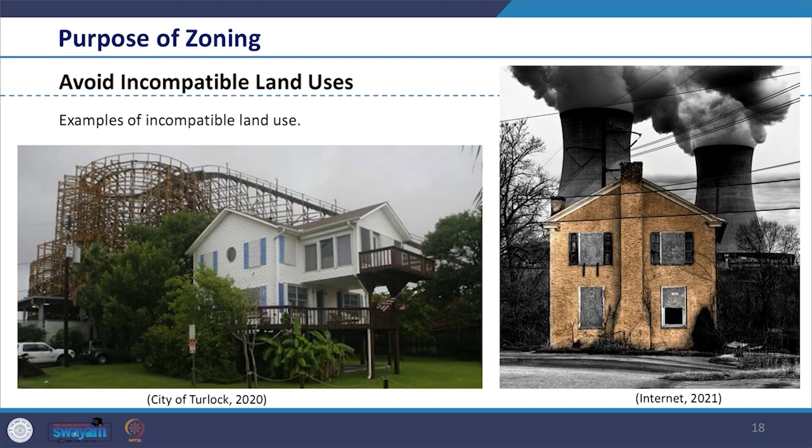Looking at the broader purpose of zoning: it is to avoid incompatible land uses coming together, prevent misuse of the land, determine the building heights and density, also look at how to give direction to the development of the city, and the need to secure convenience, health, safety, and look at the general welfare of the people.

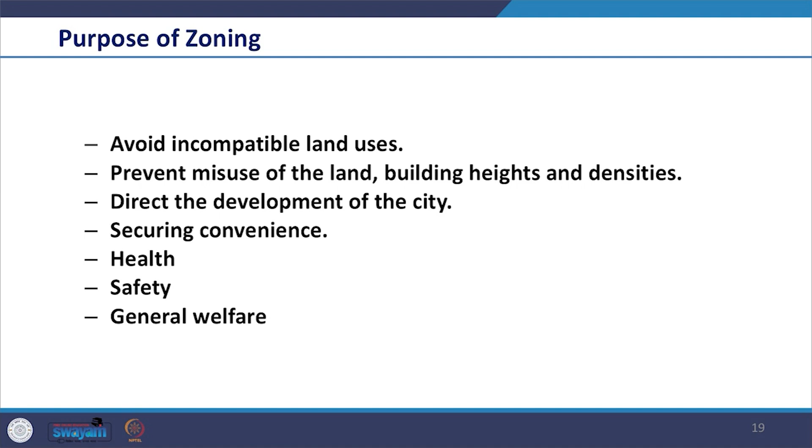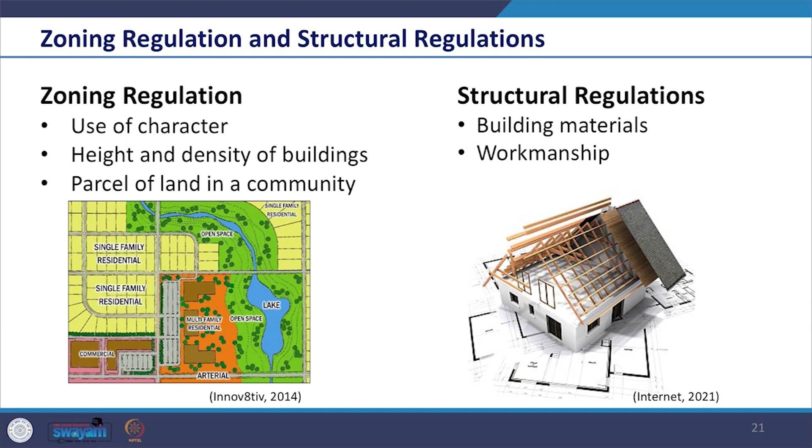Looking at the difference between zoning regulation and structural regulation: zoning regulations are meant for the use, character, height, and density of buildings, and they prescribe how each parcel, meaning the plot of land in a community or city, may be put to use. Whereas structural regulations impose restrictions on the building materials. It goes further into details of the building materials and workmanship in the form of specifications of the work.

Looking into the power of zoning and how it is executed, we see that zoning power is executed through the process of approval of plans for the proposed use and structure, and by means of site supervision. So that is how, by the approval system and the supervision system, we execute our zoning power.

Looking at the aspects of zoning, zoning is related to three main aspects. One is density zoning, height zoning, and the third one being use zoning.

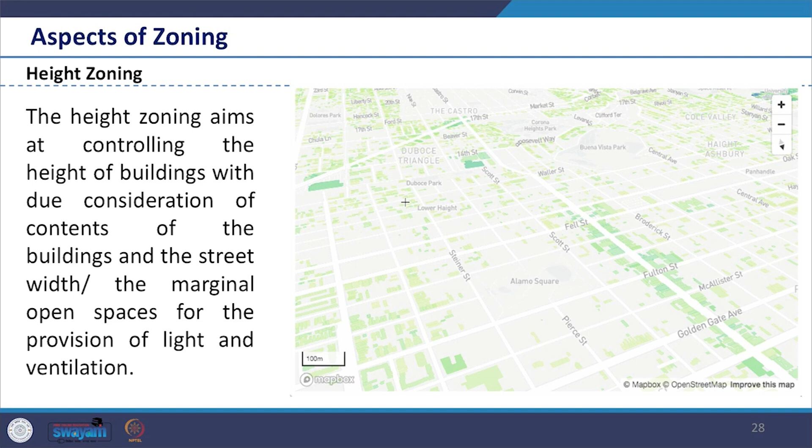In density zoning, the density of population in the residential area is controlled by means of suitable rules and regulations, whereas in height zoning, the aim is at controlling the height of the buildings with due consideration of the content of the buildings, the street width, and the marginal open spaces for provision of light and ventilation.

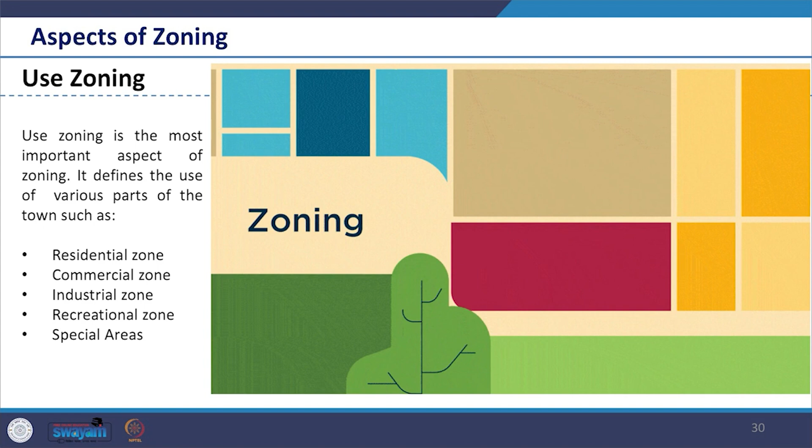Use zoning, which is one of the most important aspects of zoning, defines the use of various parts of the town, such as whether the use can be residential, commercial, industrial, recreational, or special area.

So we have seen different aspects of zoning. Now we look at different kinds of zones. Overall, there could be 43 use zones at the development plan level within 10 land use categories at the perspective level. Permissibility could be decided by the town planner depending upon the requirement and feasibility.

Now looking at the principles of zoning. The key principles which need to be considered are: one, to provide functional distribution of work centers and living areas, optimize the travel distance, and increase the efficient functioning of activities.

Further, to promote economic development, the whole intention of the urban area is for economic development, for all sectors of the economy by providing more economic space and efficiency; to preserve sensitive areas such as forests, parks, sensitive natural resources, heritage areas and water bodies; and to rehabilitate and improve the quality of life for residents.

We also look at securing health and safety by segregating hazardous industrial uses, as you may see in the example which follows. Further, to segregate nuisance areas or special uses such as logistics, warehouses, wholesale, airport, etc.

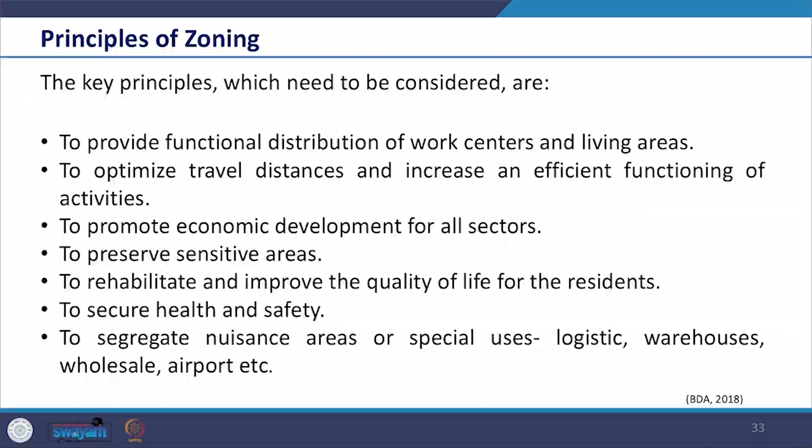Now we're going to look at and try to understand all these things through the case of the Draft Bhopal Development Plan 2031, particularly Volume 3. We will try to understand different zoning aspects and the kind of control exerted through the process and how it guides developments. We've taken this example because you've already seen the analysis and proposal vision of the city, so it will be easier to comprehend how we are translating that here.

Just to briefly refresh the problems we had seen in Bhopal through the draft Bhopal Development Plan. We're not covering all of them, just picking a few, like the challenge of conserving urban forests, water bodies and built heritage, as well as the presence of low density areas, FAR and ground coverage, and observations about a lot of commercial activities coming into residential areas.

Mixed land use activities were seen more in residential areas. Likewise, there was a lack of industrial activities, as well as observations about haphazard diversion of land and growth of illegal colonies.

So in order to address many of these kinds of problems, the zoning plan was created in the proposal. In the proposed land use plan of Bhopal city, we see that different use zones are identified. Use zoning is very important as it defines the use to which various parts of the town will be put.

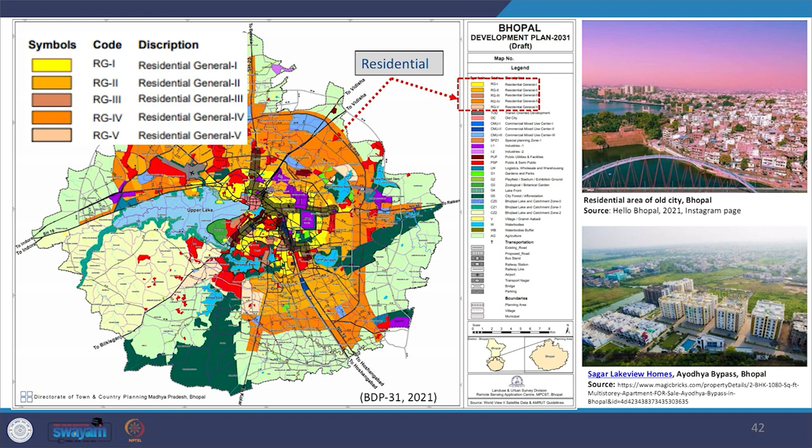Likewise, zone 4 is delineated for the purpose of urban expansion of the city, and zone 5 is delineated for low density to maintain and preserve the ecologically sensitive ecology of the city of Bhopal. So we see that through use zoning, different conditions and intentions are addressed even within the residential category.

We learned about TOD in our class as an encouraged trend in planning for efficiency, environmental and economic concern. We see here how TOD is translated into the land use zone. In the map, you can see transit-oriented development TOD shown in brown grid along the prime movement corridors.

Transit-oriented development zone is delineated as an overlay along phase 1 of the metro in this city. The purpose is to allow more people to live and work near the metro corridor. This zone is made up of existing older structures which shall be incentivized to redevelop with higher FAR, preferably undertaken through the local area plans.

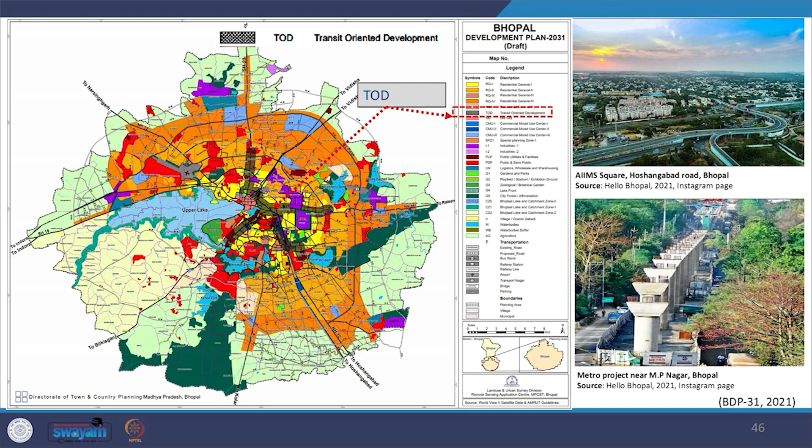You may also integrate and think about the local area plan we studied. Local area plans will be prepared to ensure the plot is utilized properly and efficiently through merger or amalgamation, and it addresses widening of roads, allows parking management, and also allows pedestrianization in this zone.

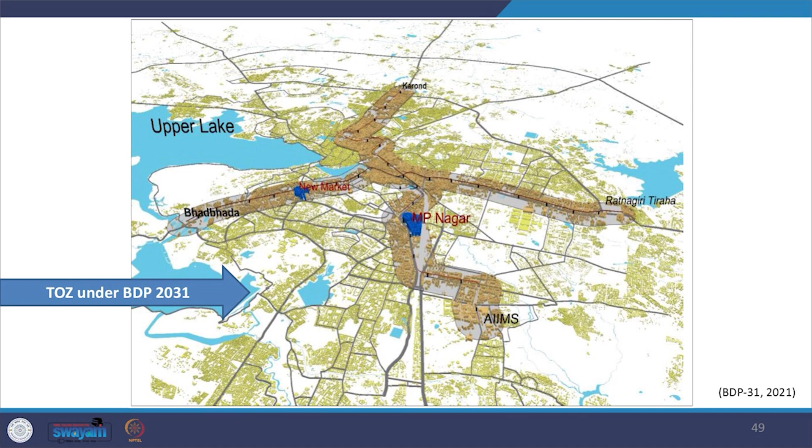The zone has been delineated 500 meters on either side of the metro alignment. Principally, all plots falling completely or partially within this 500-meter buffer from the metro alignment shall be included in TOD. The purpose of this zone is to allow and enable more people to live and work near the metro corridor. So you can see how it has been done here.

In order to promote compact TOD in the city and integrate land use and transportation interface, this concept is introduced. Transit-oriented zone is an effective tool to promote compact, transit-oriented development within walking distance of public transit nodes such as BRTS and MRTS stations.

Sustainable transit-oriented densification is planned to be achieved through TDR. That's the plan proposed by the draft Bhopal Development Plan. Transit-oriented zone is identified as a 500-meter buffer distance on either side of metro line 1 and 2, as you had seen in the map.

It is anticipated that TOZ, transit-oriented zone, will encourage people to prefer public transit, providing housing, employment, entertainment, and civic functions within walking distance of the transit nodes. It is anticipated that it will encourage residents and workers to drive their cars less and ride public transit more often.

So we see that Bhopal Development Plan specifies permissible FAR. FAR is a means to control density. There's also an aspect of density zoning.

Here you can see in the TOZ, higher FAR is being offered than the residential area. Here it's 3 FAR permissible, whereas for residential it was 2. You may also reconnect your thoughts to the type and levels of plans.

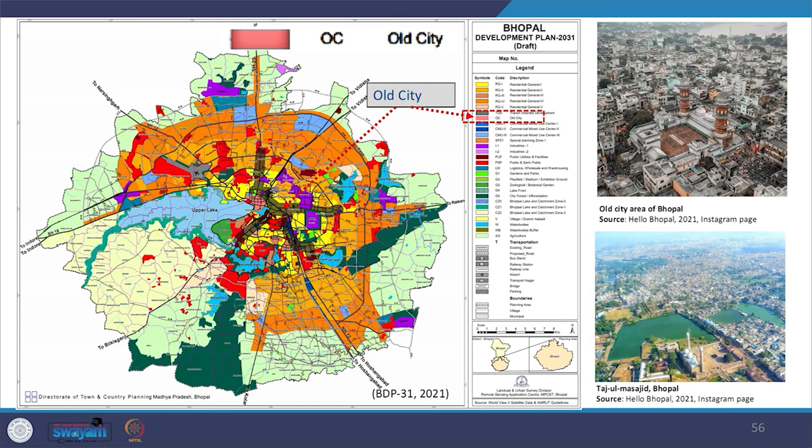For the purpose of conservation of heritage precincts and structures within this zone, the appropriate authority has recommended undertaking preparation of a heritage conservation and management plan for Old City Zone, where they would identify and categorize all structures and precincts based on their heritage value.

This heritage conservation and management plan would also be prepared by the urban local body or any appropriate authority, along with local communities and relevant heritage committees, to identify heritage structures and heritage precincts as listed by the State Archaeological Department in the Old City Zone.

Based on this management plan prepared by the authority, the plot owners within the zone will be incentivized to undertake preservation and conservation of their heritage properties through receipt of heritage TDR, transferable development rights.

Once the heritage conservation and management plan for the zone is prepared and approved by the appropriate authority, the regulations identified in that plan shall prevail over these regulations. So once that heritage plan is there, newer regulations would come.

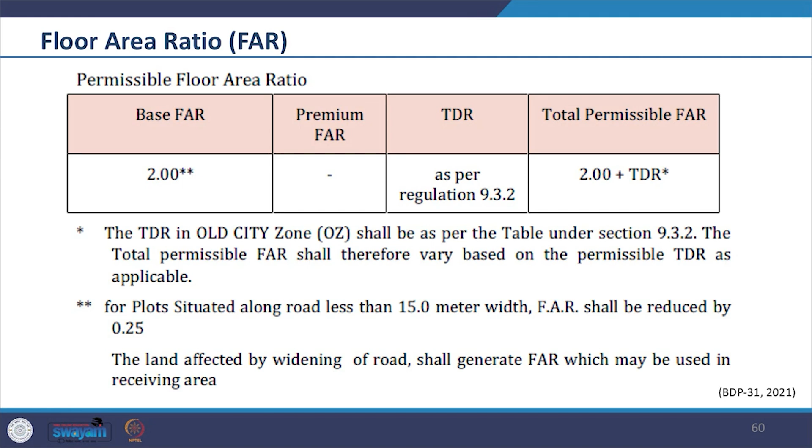You can see the FAR and TDR for the zone in the table given here, which is the total permissible FAR plus the TDRs for encouraging the management of heritage structures and precincts. So you see how cultural or heritage aspect is addressed in a city through zoning.

Moving on, we see next the commercial mixed use zone.

You can see how it has been distributed across the city to cater to the entire population. In the plan, the authority has divided three commercial mixed use zones as zone 1, 2 and 3. The first zone has been delineated envisaging the upgradation of the current commercial center of MP Nagar to a commercially mixed use center.

The target is to provide higher FAR so it can accommodate a larger population. The idea is to transform this place from commercial to mixed use, and higher FAR means increasing the density of the zone.

Likewise, commercial mixed use center 2 has been identified envisaging the upgradation of existing commercial subcity centers like New Market and so on, which will be converted to commercial mixed zone with higher FAR. Similarly, commercial mixed use center 3 has been identified as a new proposed commercial area under the Bhopal Development Plan 2031.

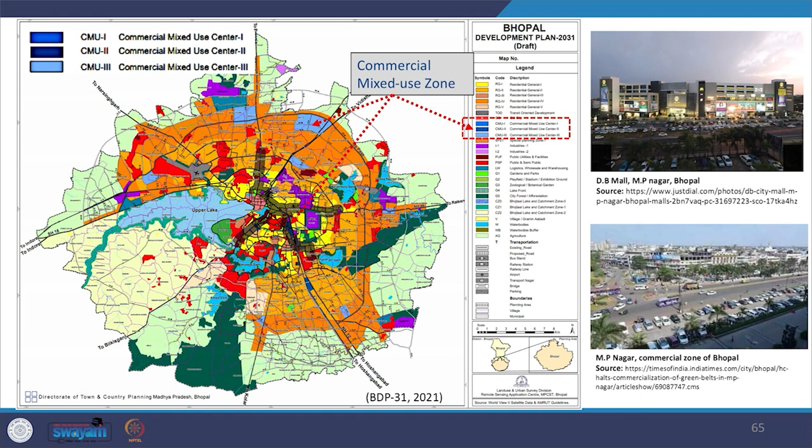By changing the use zone from commercial to commercial mixed center, they are changing the nature of the place to counter the identified problem. By altering the FAR, they are going for higher density, and you can see the use of the density zoning tool.

Density zoning controls the density of population in any area through suitable rules and regulations. Here you can see the FAR in the Bhopal Development Plan: in case of residential, 2; in case of TOD area, 3; in case of old city zone, 2 plus TDR; and in commercial mixed use, the range is from 3 to 5 FAR.

Further, the municipal corporation would be charging a betterment levy, a one-time payment on mixed land use activities. So you see how resources are mobilized when such services are provided.

The density of population per unit area may either be expressed as gross density or net density. Gross density is defined as the average density of population per unit area of the whole residential zone. Net density is defined as average density of population per unit of the housing area, including local roads only, and excluding open spaces, public institutions, shopping centers and so on.

We may further find the detailed formula in URDPFI guidelines point 7.3.3, page 236, provided here for your reference, for both residential as well as non-residential area. So you have seen partly how density zoning control is used.

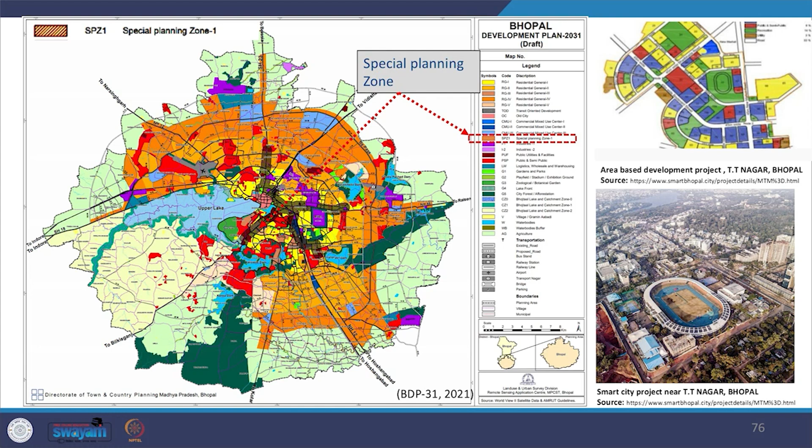Moving further, we see another kind of use zone, which is industrial. The industrial zone has been delineated to identify areas where large, medium and small scale industrial activities are either currently located or are proposed to be developed in future for the purpose of promoting the secondary sector economy in the region.

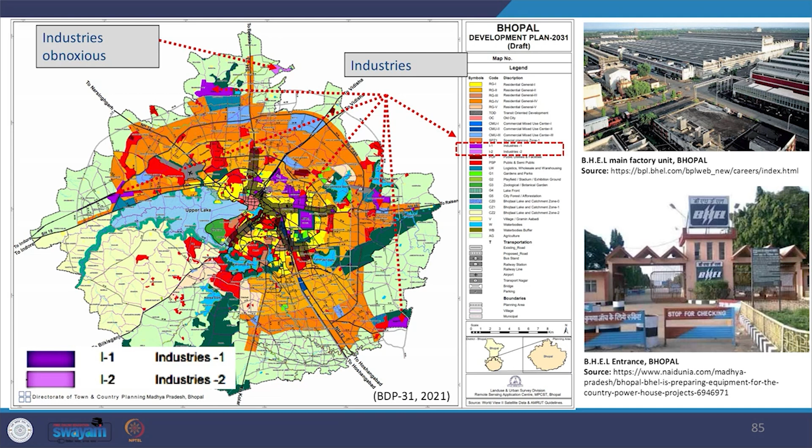There is also industrial zone I2, delineated to identify industrial areas where the current permissible activities are unfit for human habitation. The purpose of this zone is to ensure that non-compatible activities, such as residential areas, are not allowed to be made permissible in close proximity, so they have been placed farther ahead.

So you see here how use zoning is done for economic purpose as well as environmental safety. Obnoxious industries are located at the extreme end of the city, taking care of wind direction and away from the residential area, located in the agriculture zone with a buffer area. You may also recollect the gas tragedy in 1984 experienced by the city and the loss of life, one reason being the location and the wind direction.

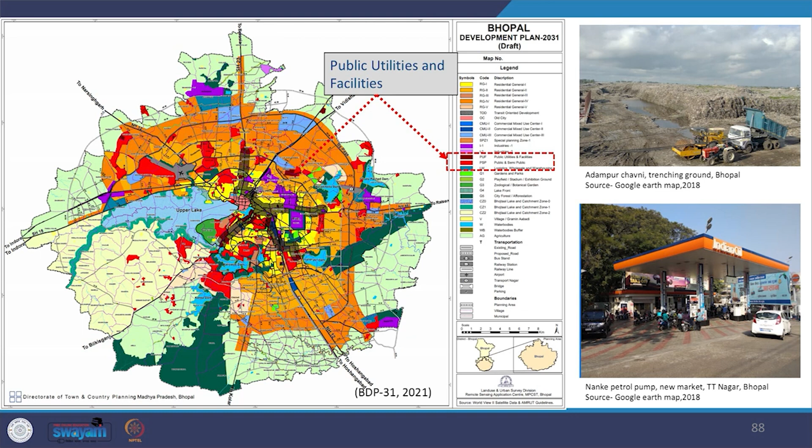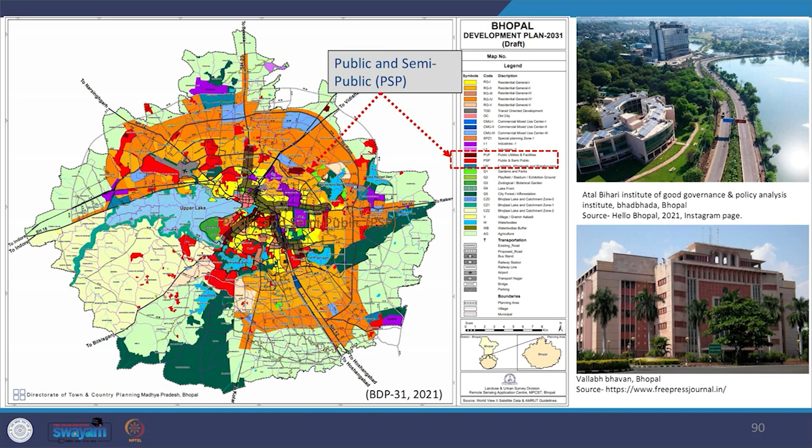Moving on, we see another kind of zone, the public utility and facilities zone. This zone has been identified for provision of key infrastructure in the Bhopal planning area, and you can see how it has been uniformly distributed to cater to the entire city population. We also see the public and semi-public zone, marked in red, identified for large-scale institutional, administrative, educational, health and social cultural activities within the Bhopal planning area.

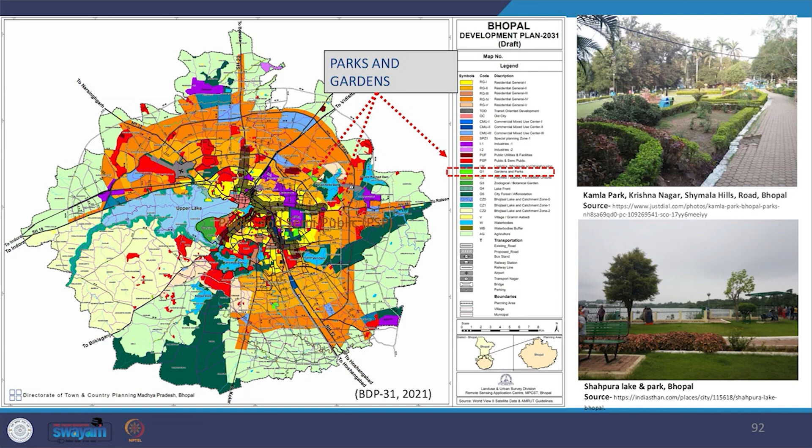Further, we see parks and gardens zone has been created, G1. This zone is delineated to incorporate various levels of existing land and proposed major green areas, including parks at the city level, regional level and district level in the planning area of the city.

Moreover, you also see play field, stadium, open exhibition zones, and zoological botanical gardens as G3 zone. This has been delineated to incorporate all existing zoological botanical garden premises in the Bhopal planning area. Activities as per the guidelines of the Environmental Ministry of Government of India shall be permissible in these zones.

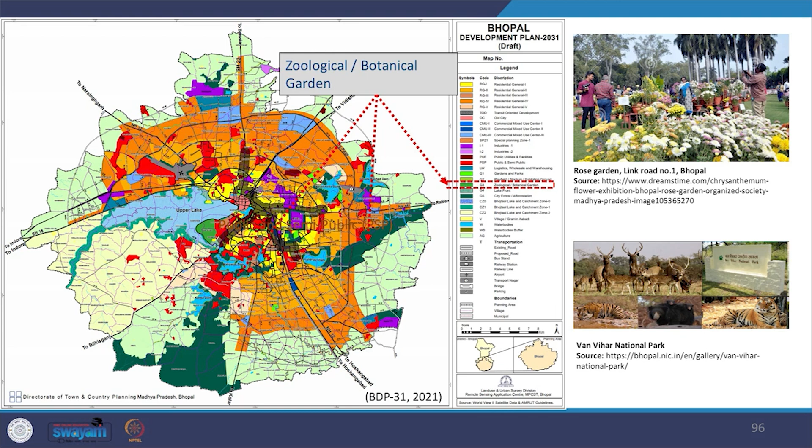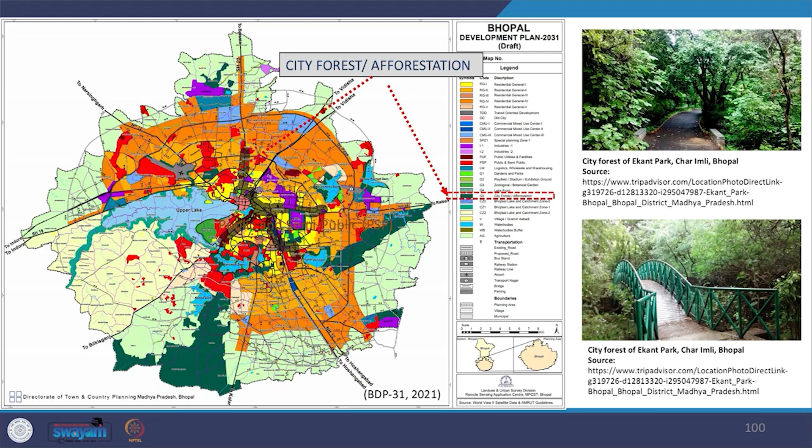We also see lakefront. This zone has been identified to delineate all existing areas where lakefront development was undertaken within Bhopal planning area. We also see the city forest, which has been delineated to secure high intensity vegetation across the city. You also see how the topography aspect and environmental considerations are addressed through the use zoning here.

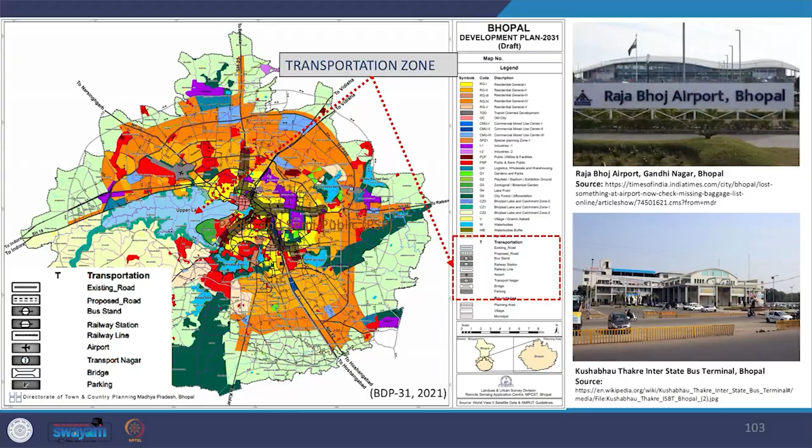Now moving forward, we also see transportation zone. The major transportation elements of the city have been identified under this zone, including airport, railways, cargo, bus terminal and stand, bus stop, transport nagar, metro roads, depot and multi-level parking and so on. So you see how city and regional level infrastructures are taken care through use zoning in this case.

Moreover, you also see that the lake and catchment zone has also been identified as CZ1. This zone has been delineated as the most sensitive area with stringent regulations around it. So you see Bhojtal. This zone has been delineated incorporating areas within, like they have created buffers of 50 meters and above, and what kind of activities would be allowed there.

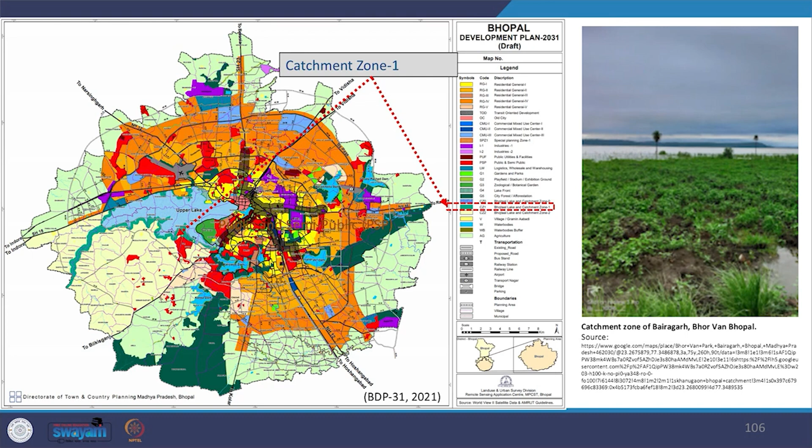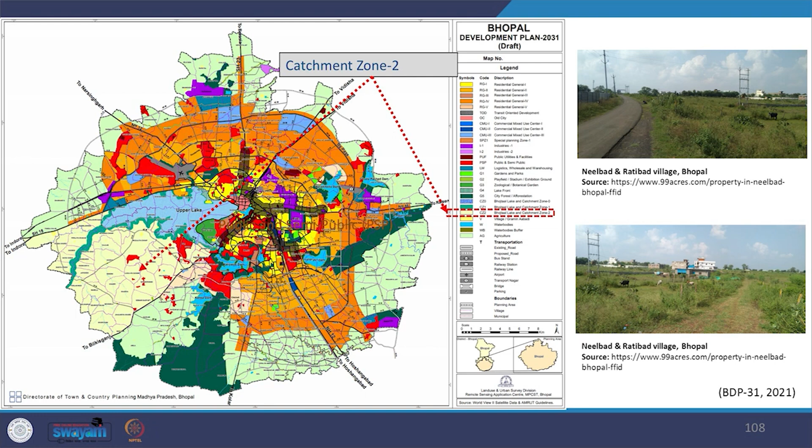Bhojtal Lake and Catchment Zone 2, CZ2, constitutes all catchment areas beyond the Catchment Zone 1 buffer except the villages and their extension areas in the Bhojtal Lake. This zone has been delineated to regulate eco-sensitive development for promotion of tourism and allied activities in the Bhojtal Lake catchment. Further, we see water bodies buffer.

Further, we also see that there is a general agriculture zone. This zone identifies the primary agriculture areas with supporting activities in the peri-urban areas of Bhopal planning area. You can see it all around the periphery. We further see how the entire ecology has been addressed through the use zoning here again, how the water, the green, everything has been addressed through zoning.

We further see village areas have also been identified here, so as to enable villages to exist without losing their organic and traditional form and character. So we see the village extension zones 1 and 2. Also, you see how the distinct character of the villages is retained in the city. You may also revisit the city vision, what their vision was and how it translates here.

So we have covered all the different use zones, as well as density zoning to a certain extent, which restrict what use will come in which areas, to provide functional distribution of work centers and living areas, optimize travel distance, and make efficient use of resources and allow efficient functioning of activities through use of TOD. It has also looked into how to promote economic development of all sectors of economy by providing more economic space. You saw the industrial space, commercial space coming in here.

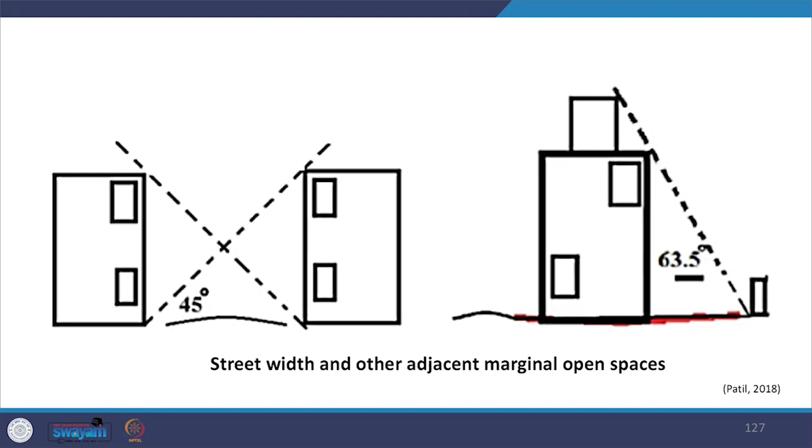As you can see in the image here, the height zoning restriction depends on nature of building, type of zone and climatic conditions. Advantage of height zoning is that it controls the development of the central business area of cities, and thereby assists in solving problems associated with heavy concentration of traffic and so on.

It provides aesthetics, we had already seen this. It prevents monopoly of light and ventilation. It regulates land values. And the most important aspect is that health and traffic movement are regulated by height

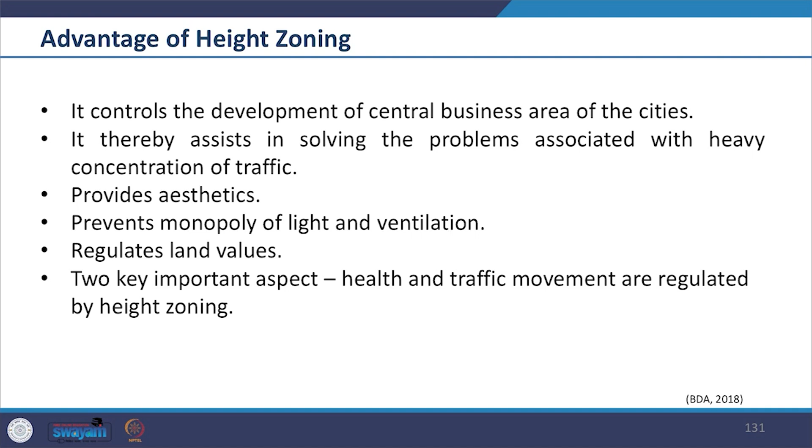zoning. We will further see through the example how density zoning is achieved through regulating marginal open space.

We will look at the residential general category use from the Bhopal Development Plan. Residential General 2 is envisaged primarily as a residential zone with mixed use permissible based on specific conditions. This zone is primarily made of existing older structures, as you have already seen before. The purpose of this zone is to allow urban regeneration while maintaining the overall urban character of the area.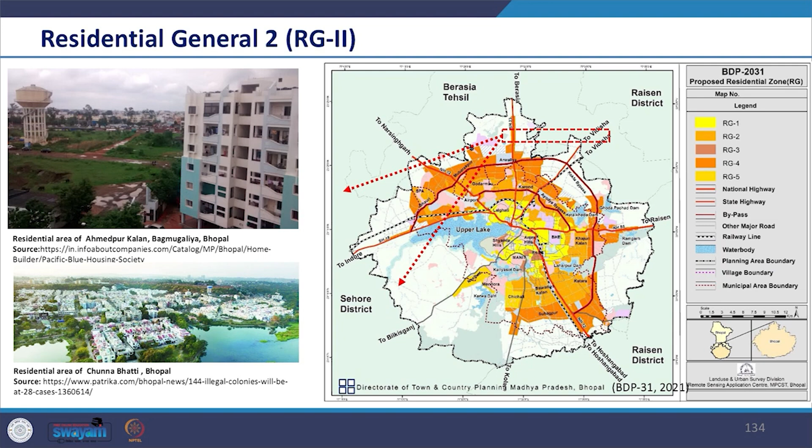So here you see that the permissible activities have been defined. The activities which are permissible in this zone are residential activities, commercial activities, institutional activities, recreational, industrial and logistic activities, as well as transportation activity.

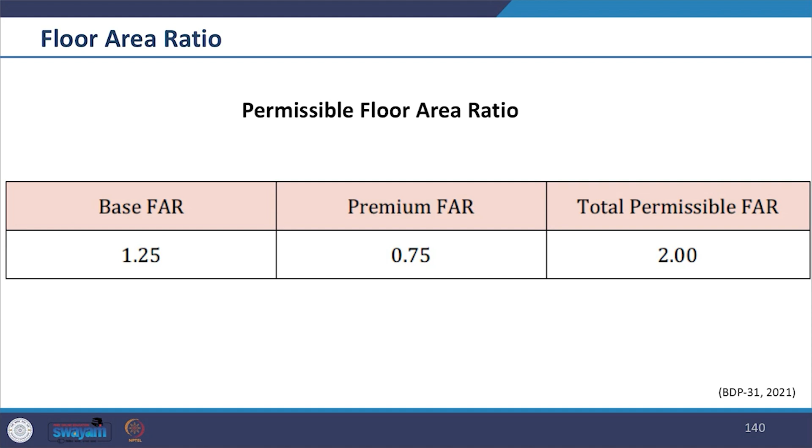Further, you can see the norms for development of individual plots, such as minimum plot size for different development types. Further, you can see details of means of access.

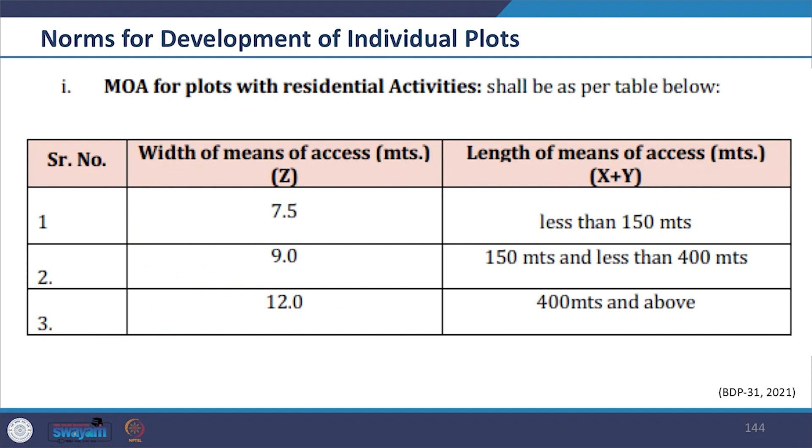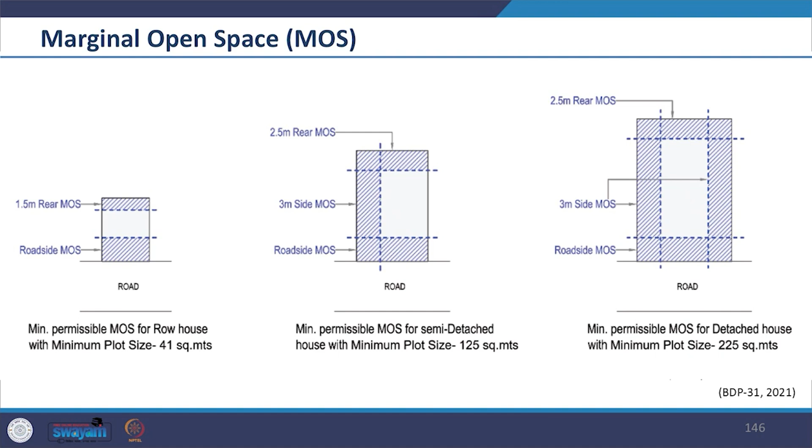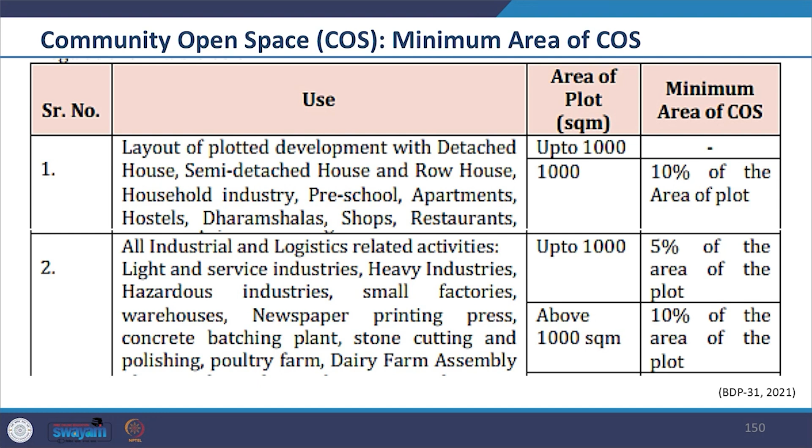So we saw that zoning is one of the important planning tools to manage growth, regulate density, and organize land uses within the urban area. By regulating land uses, it helps to segregate incompatible uses, increase livability, and create desirable character for different areas for the city. Zoning combined with development regulations determines the supply of developable land and built-up space in various zones.

And then we see that zoning requires regulations and rules to avoid any developmental violation. So we saw all these things, plus how we are looking at controlling as well as creating flexibility at the same time, ensuring that it is not exclusionary.

So summarizing today what we have covered, we looked into the meaning of the term zoning, we reviewed the purpose of zoning, we also looked at the difference between zoning regulation and structural regulation.

We discussed and listed different aspects of zoning, and then we looked into detail through the case study. We listed and identified land use zones through the help of the case study here as well. We discussed the principles of zoning, what's the core purpose behind it.

The entire session, we reviewed the case study of the draft Bhopal Development Plan and saw the overall relevance of the tool with its ground translation. So you could see how the entire vision, the development plan, along with the local area plan and all these zoning tools, how the entire vision is translated on ground.